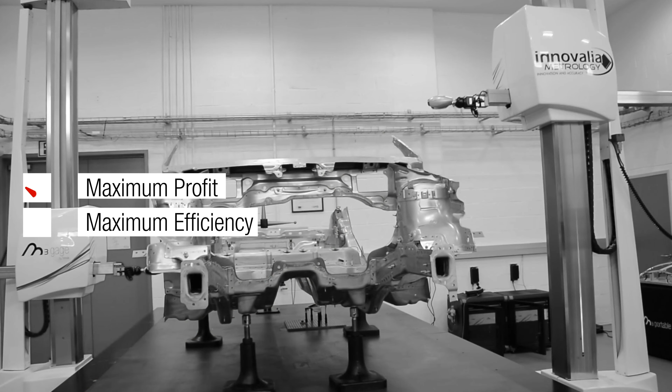At Innovalia Metrology, we have been offering our customers the best products and advanced services in industrial dimensional metrology for 30 years. We manufacture coordinate measuring machines, tools, optical sensors, and measurement software. We provide optimized intelligent measurement solutions, turnkey projects, and consulting and quality control duties.

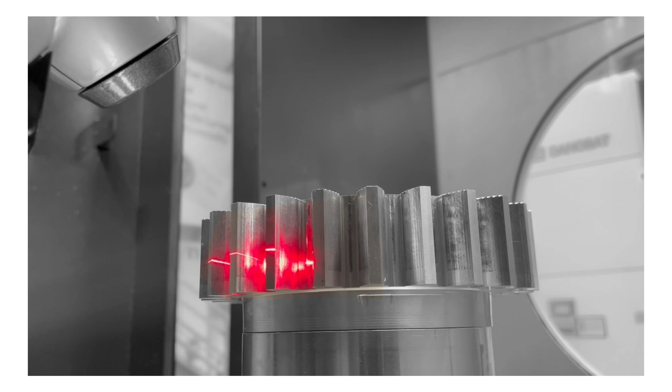Innovalia Metrology means innovation. We are committed to investing in new technologies that allow us to stay at the forefront of the industry. Our commitment is to offer you the best assets to raise the quality standards of your company and reduce production times as much as possible.

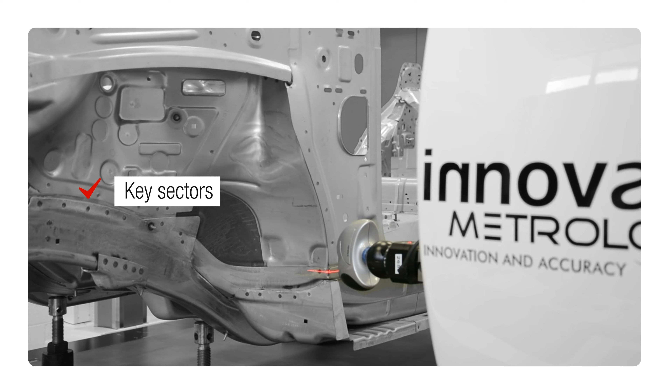We provide support to leading companies in key sectors, and we do so by focusing on internationalization. We assist our customers from our global headquarters, with instant availability and thanks to our wide network of international partners.

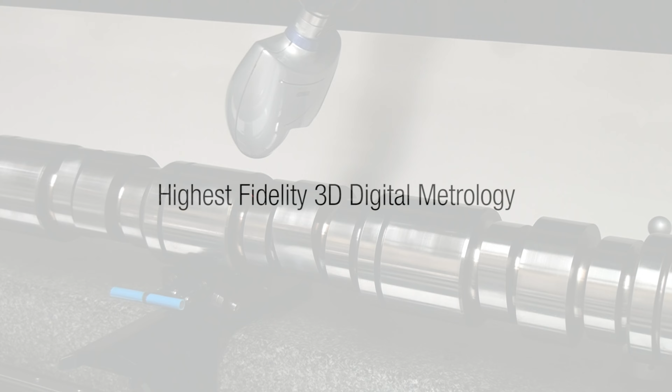Unimetrik is a Spanish metrological service company, oriented to offering solutions for the industry related to calibration, measurement, and metrological engineering, and is currently exporting its technology in Europe and other relevant industrial countries all around the world.

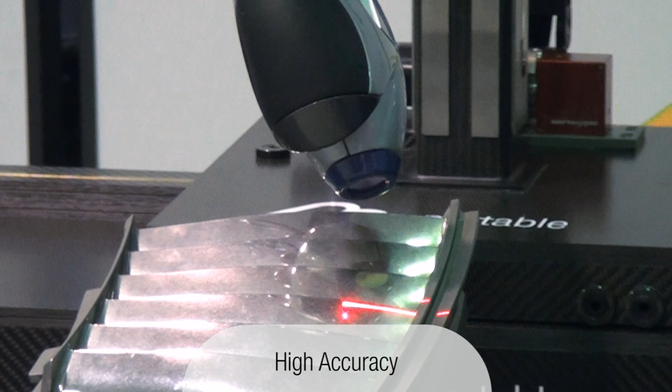Among the metrological solutions currently offered by Unimetrik, the most relevant and also those that have been used in the XMANAI project are the metrological studies utilizing Optiscan and the M3 software, an optical measurement system used to capture and analyze point clouds of industrial parts and components that are provided for testing the tolerances, taking into account the accuracy required in each case.

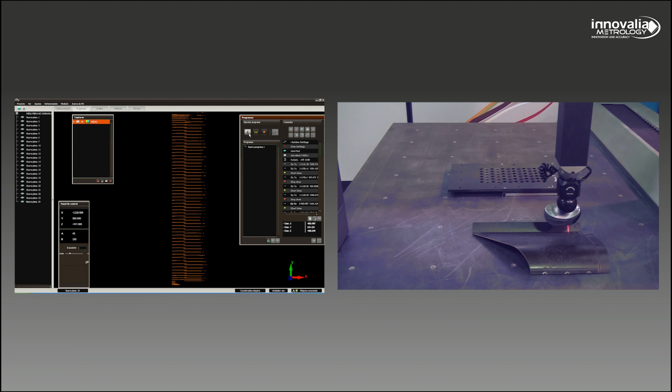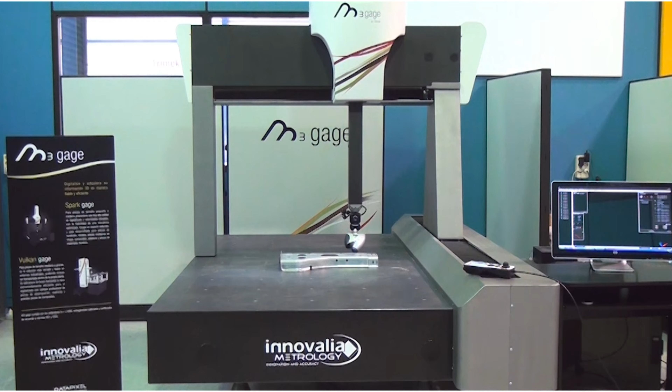Companies dedicated to manufacturing parts and components for energy, aeronautical or automotive sectors are receiving dimensional quality requirements and tolerances from large companies that can only be achieved with optical technology. The amount of information that this technology handles is large, with a point cloud made up of 15 million points.

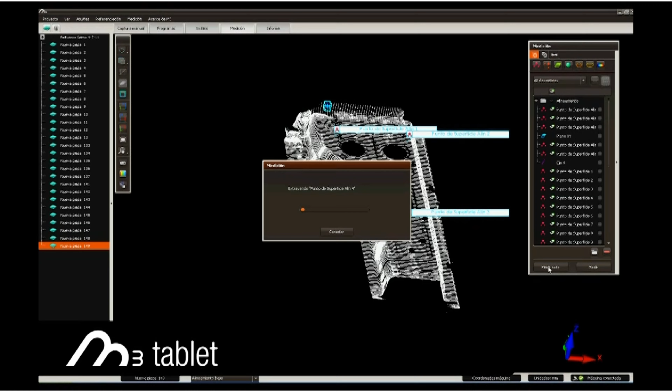Therefore, the management and calculation algorithms have to be optimized to the maximum. The Unimetrik pilot focuses on optical measurements for machinery components using M3, a high-performance software for capturing and analyzing point clouds. However, this parameterizable software provides different results depending on the expertise of the operator, and as it is designed as a black box, it makes it difficult to verify those results and the process behind.

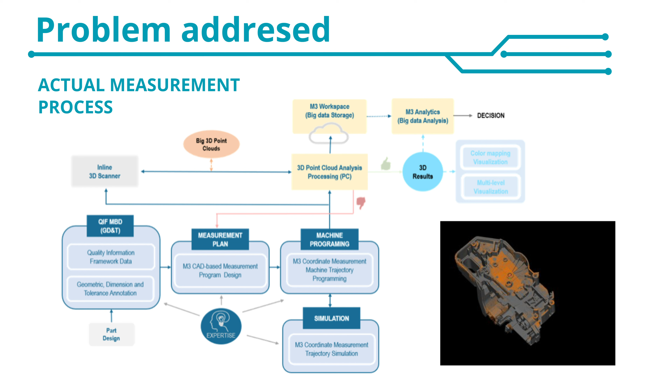Before starting programming the M3 software, it is necessary to design a strategy that depends on numerous characteristics of the physical part and parameters that the manufacturer requires. Usually, it is necessary to prepare a so-called measurement plan for each part by observing its characteristics and also establishing the key scanning parameters to capture the point cloud.

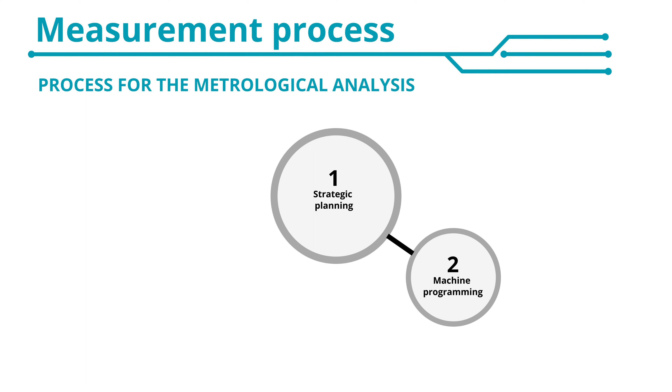On top of that, this measurement plan is designed only tacitly, profiting from the information that previous similar projects have with the object of study. Not only is it a waste of information, due to the know-how from previous projects being difficult to preserve, but also a waste of time, since it requires metrologists with relatively high experience, and this can be translated as a gap in the process improvement and a suboptimal process yield.

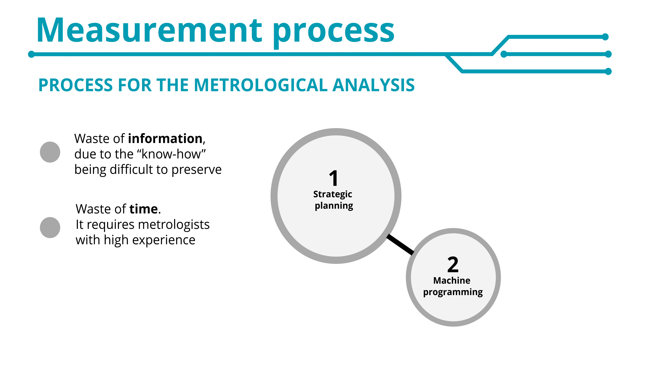The main goal of Unimetrik applying XAI for smart semi-autonomous hybrid measurement planning is to increase the efficiency in the measurement plan definition by reducing errors and speeding up the execution of the measurement, as well as predict, based on certain key parameters, the level of reliability of the result.

The Unimetrik Demonstrator will be focused on two main use cases. The first one, the measurement plan optimization, is aimed at retrieving a double benefit. XMANAI will contribute to reuse relevant information such as key parameters value configuration from previously performed jobs.

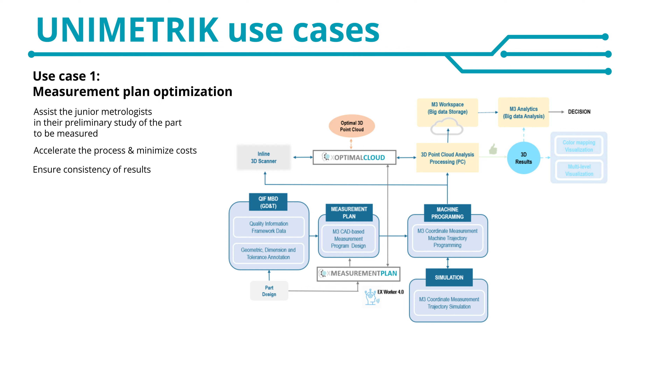XMANAI will help metrologists in identifying the correct values for the scanning parameters, but also to understand why and how they impact the quality and accuracy of the measurement.

Experienced metrologists with extensive experience can identify which regions of the part component are the most relevant to be measured, and so they are the ones that can adequately define the measurement strategy in the M3 software.

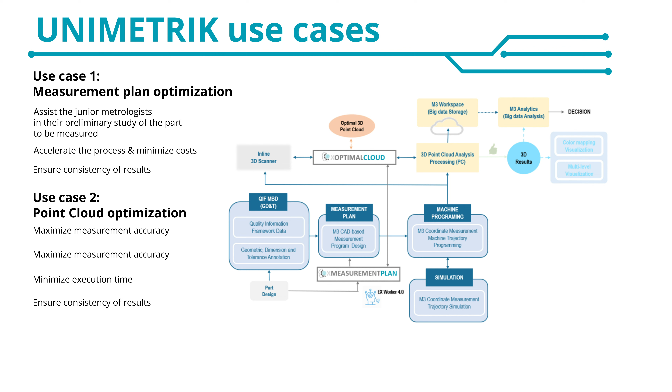This generates different results, accuracy level, and different time investments on the same measurement while performed by a senior metrologist and a junior metrologist. Additionally, different values for scanning main parameters, such as point cloud lateral density, scanning direction, and exposure time, result in measurements with different quality and accuracy.

The second use case, the point cloud optimization, is aimed at generating a reduced optimal point cloud that will provide the best accuracy in the following analysis and processing of the point dataset.

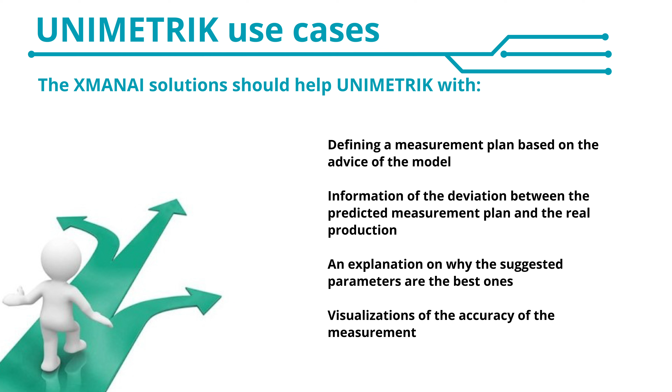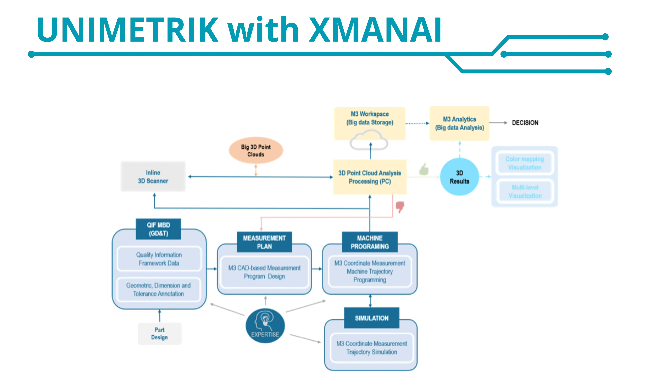Nowadays, only experienced metrologists have the ability to identify which regions of the piece to be measured are the most relevant, and so they are able to define accurate point sets. XMANAI will help in the knowledge transfer process from experienced metrologists to junior metrologists by not only optimizing the point cloud but also explaining the impact of those specific point sets on the final accuracy of the measurements.

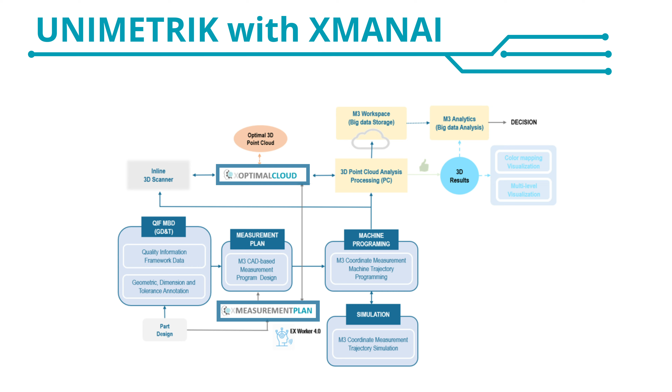The XMANAI Measurement Planning Manufacturing app consists of 4 tabs: Point Deviation, X Deviation Model, Y Deviation Model, and Z Deviation Model, to provide predictions on global and per-axis errors in point capturing for the object under study. The starting point is a point cloud generated by a preliminary scanning with randomly selected conditions and scanning parameters. This is used as a reference point cloud to perform the inference for any scanning configuration. Results appear first in the Point Deviation tab as predicted error maps, then on the other tabs, one per axis, with explanations at local and global level depending on user selection.

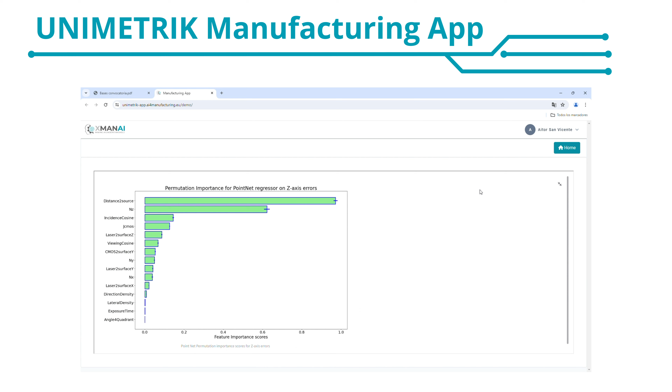The visualization of positive and negative errors follows the standard red and blue color scheme, with errors close to zero depicted in green, in accordance with user intuition. A permanent dictionary of input feature descriptions is included in the left side panel, as well as a converter of cosine values to angles in degrees. These features are added in the side frame to facilitate comprehension of the explanations by end users without adding too much information to the actual plots.

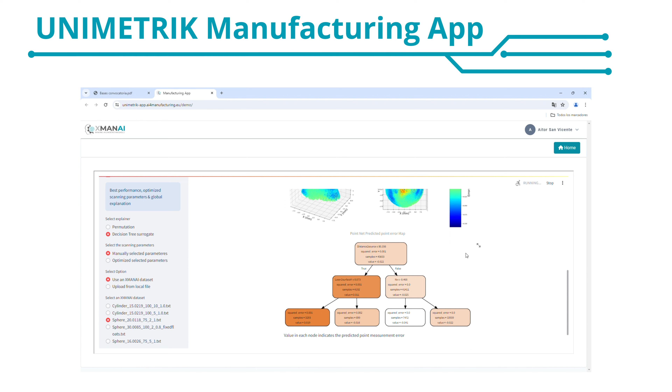The Unimetrik Manufacturing app includes a scanning parameter optimization. The user, having already chosen the preliminary point cloud of the object under study, is provided with the option to either optimize the scanning parameters for the given object or select them manually. If they choose to optimize the scanning parameters, these will be automatically filled in once the optimization has finished.

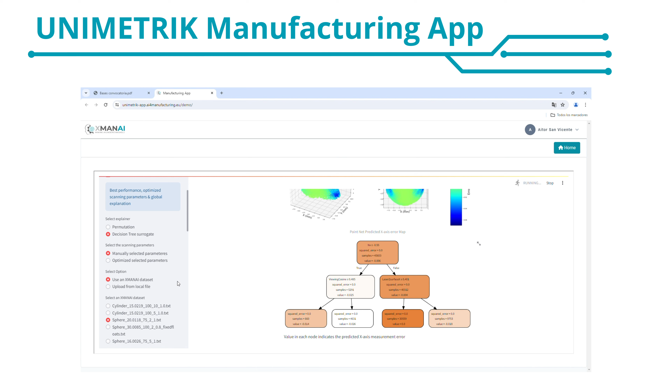The benefits that the XMANAI platform and the manufacturing application being developed for Unimetrik are based on are efficiency and accuracy, the main characteristics of metrology as a quality control process for manufacturing. A testing and evaluation team composed of 2 junior metrologists and 2 experienced metrologists was selected for testing and validation of the solution. Various demo sessions were held to retrieve end-user feedback and measure the main business KPIs. By solving the 2 use cases, key parameters and point cloud optimization, the XMANAI manufacturing application has delivered to Unimetrik a reduction of the time invested in defining measurement plans by 14%, and also a reduction of half the errors of the measurements for both junior and experienced metrologists.

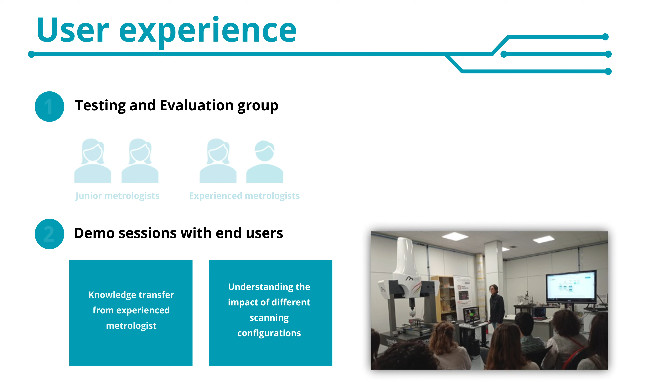It is highly remarkable that the XMANAI application had a relevant impact on the efficiency of the new explainable metrological process, and the added value that the XMANAI platform is offering to the organization. Moreover, through the use of explainable artificial intelligence, junior metrologists in Unimetrik will be able to effectively define a measurement strategy based on understanding the impact that decisions have on the accuracy of the measurement. This is the actual knowledge transfer process that the organization is in need of.

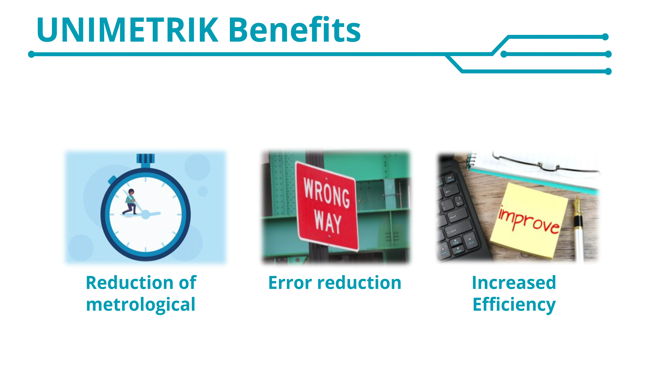When considering point cloud optimization, the XMANAI solution is aimed at generating a reduced optimal point cloud that will provide the best accuracy in the subsequent analysis and processing of the point dataset. Nowadays, only experienced metrologists have the ability to identify which regions of the piece to be measured are the most relevant, and so they are able to define accurate point sets. XMANAI will help in the knowledge transfer process from experienced to junior metrologists by not only optimizing the point cloud but also explaining the impact of those specific point sets on the final accuracy of the measurements.